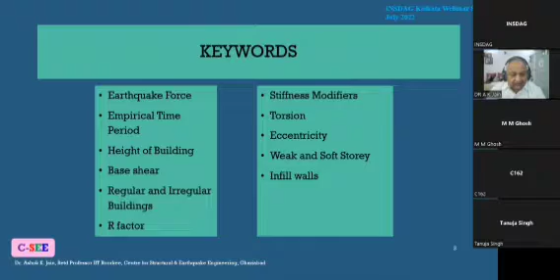Now, understanding Indian codes on earthquake: it is quite difficult to understand 1893, 13920 and 16700 codes, mainly because of the following factors. The level of seismicity in India has been raised equal to or more than that in California and Japan without any quantitative or even qualitative evidence through various stipulations. These codes have been developed using copy, paste, and edit technology. There is no correlation between the original clause and the final clause that has appeared in our code.

The BIS did not produce any commentary, nor is any background information available in the minutes of the meetings which were held to revise this code.

In the absence of all this information, it becomes really difficult to understand and explain the basis of various clauses of IS 1893 code. Some popular commercial software for seismic analysis are unable to comply with some clauses of IS 1893 code because of lack of any logic.

As I mentioned in my previous lecture, although those software claim they are following the 1893 code 2016 edition, if you go through the user's manual, you will find certain clauses they are not able to comply with, and these are clearly mentioned in their user's manual. So please go through the user's manual and find out which clauses are not being implemented.

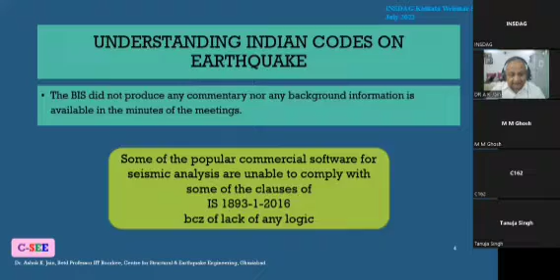Writing a code is an art. I've been associated with this activity since I began my career in 1974 at the Department of Earthquake Engineering, University of Roorkee. The 1975 edition of code 1893 was under preparation at the time. Since 1982, I was associated with the revision of IS 800, later with the revision of 456, 1343, 3370, 4326, and so on.

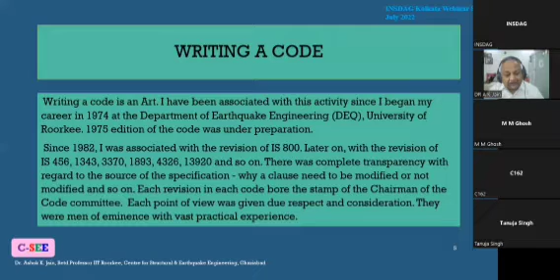There was complete transparency with regard to the source of the specification, why a clause needed to be modified or not, and so on. Each revision in each code bore the stamp of the chairman of the code committee. Each point of view was given due respect and consideration. They were men of eminence with vast practical experience.

The bottom line in writing a code is that the code must be user-friendly and meant for a common designer, not for an expert. It need not reflect the latest research, but must reflect the latest best practice. There should not be any serious mismatch between existing buildings and new ones, to avoid any need of retrofitting of newly built buildings.

Innovation in design must be encouraged. The code must be flexible and forward-looking. The first draft of this code came out sometime in 2006. The last draft came out in February 2016. Comments were circulated, and the committee approved the draft in June 2016.

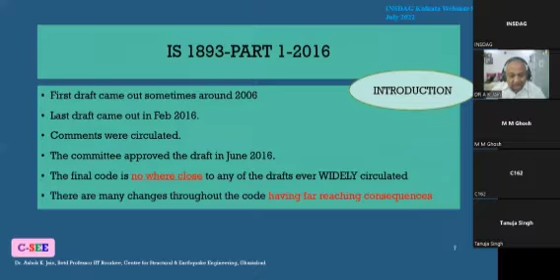The final code is, incidentally, nowhere close to any of the drafts ever widely circulated for this 2016 edition. There are many changes throughout the code having far reaching consequences than what was circulated in June or approved in June. As I mentioned, please do refer to amendments A1 and A2 of this code.

Now, significant changes. What are the significant changes in this code? A very brief note on the foreword. The previous editions gave a detailed explanation and background of the earthquake resistant philosophy adopted in the code. The foreword in the 2002 edition ran 4 A4 size pages. The foreword in the draft 2016 code ran in 6 pages, but the foreword in the final code runs only in 2 pages, first and last page. I wish the foreword was much more detailed, giving the philosophy and background information for the benefit of users.

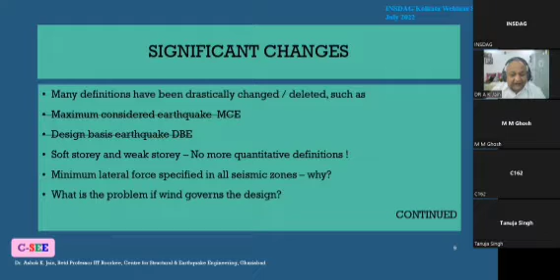Many definitions have been drastically changed and deleted, such as maximum considered earthquake, MCE, and design basis earthquake, DBE. These definitions have been deleted. Soft story and weak story were earlier quantitative, now they are simply qualitative. Minimum lateral force is specified in all seismic zones. Why? What is the problem if wind governs the design? Now, once they have deleted the definitions of MCE and DBE, it becomes very difficult to explain the presence of factor 2 and R in the base shear equation.

Treatment of soft story and weak story with URM, unreinforced masonry walls, is specified. Treatment of RC frame buildings with open stories and URM is specified. Treatment of torsion is changed, making it more difficult to implement even with the help of two widely used programs, STAAD and ETABS. Two different response spectra are introduced, different for static and dynamic analysis.

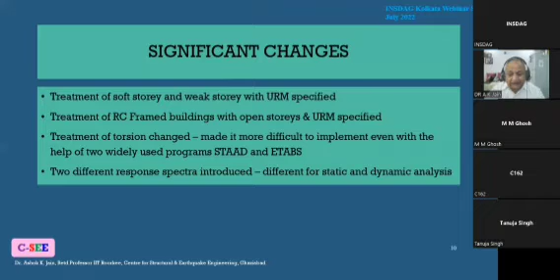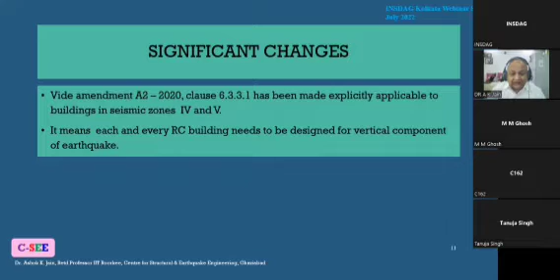With Amendment A2 2020, clause 6.3.3.1 has been made explicitly applicable to buildings in seismic zones 4 and 5. It means that each and every RC building needs to be designed for the vertical component of the earthquake, which in my opinion is completely unnecessary and not required. It's simply crazy.

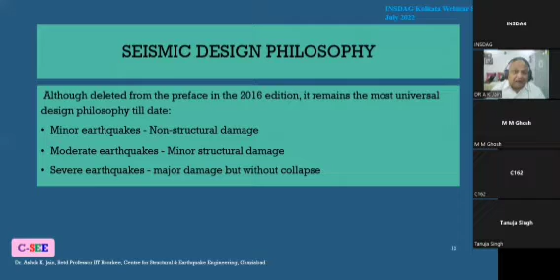Seismic design philosophy, although deleted from the preface in the 2016 edition, remains the most universal design philosophy in all countries of the world till date. Minor earthquakes: there should be no structural damage. Moderate earthquake: there can be minor structural damage. Severe earthquakes: major damage, but without any collapse of the building. These different mechanisms - partial collapse, full collapse, and story mechanisms, etc. - have already been discussed in my first lecture, which was held in the month of June.

In the 2002 edition, it was stated that the design lateral force specified in the standard shall be considered in each of the two orthogonal horizontal directions of the structure. For structures which have lateral force resisting elements in the two orthogonal directions only, the design lateral force shall be considered along one direction at a time, not both simultaneously. Structures having lateral force resisting elements, such as frames and shear walls, in directions other than the two orthogonal directions shall be analyzed considering the load combination specified in 6.3.2.

This clause has been deleted in the 2016 edition.

Now, coming to regular and irregular configurations. A perfectly symmetrical building should have symmetry with respect to geometry, mass, and stiffness, both in plan and elevation. If a structure is geometrically symmetric in plan and elevation, with symmetric mass and stiffness in plan and elevation, that is called a perfectly symmetrical building. In that case, tables 5 and 6 are simply not applicable.

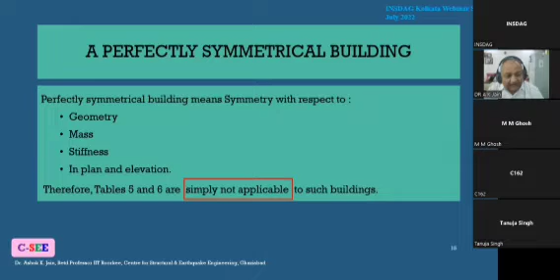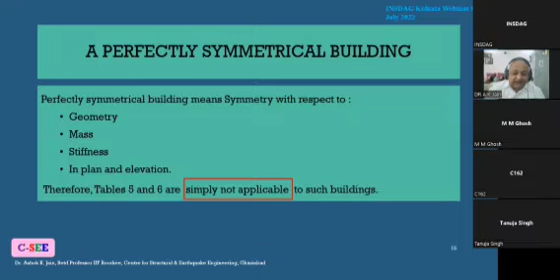I was talking about the perfectly symmetrical building, meaning symmetry with respect to geometry, mass, and stiffness, in plan as well as in elevation. Therefore, in such a case, tables 5 and 6 are simply not applicable to such buildings. But table 6 clause 7 is the culprit.

If you take a perfectly symmetrical building, one that is perfectly square in plan, it will have equal translational periods of vibration in the two orthogonal directions, or it may result in a diagonal mode of vibration. Many designers interpret this as an undesirable mode, an irregularity. They intentionally make it unsymmetric so that the first two translational periods are more than 10% apart, turning a perfectly symmetrical building into an irregular one because of that clause, forgetting the advantage of zero structural eccentricity and nil torsion in a perfectly symmetrical building.

It is collateral damage caused by this seismicity activism by some people in the IS Code Committee. Both ASCE 7-2019 and Eurocode 8 specifically state that a symmetrical building is highly desirable. Clause 7 on buildings in the Indian code omits symmetry as a desirable attribute.

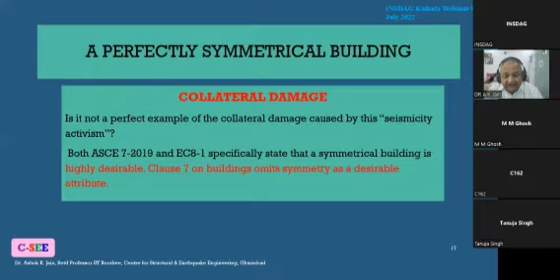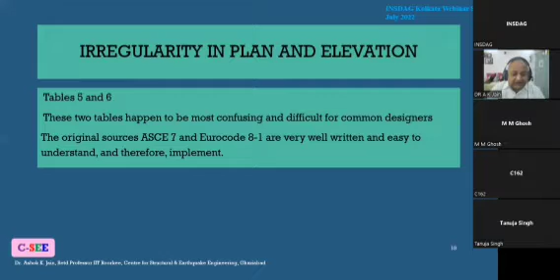Tables 5 and 6 happen to be the most confusing and difficult for common designers. The original sources, ASCE 7 and Eurocode 8, are very well written, easy to understand and therefore easy to implement. Until the 2002 edition this provision was easily understood, but not in the latest edition anymore.

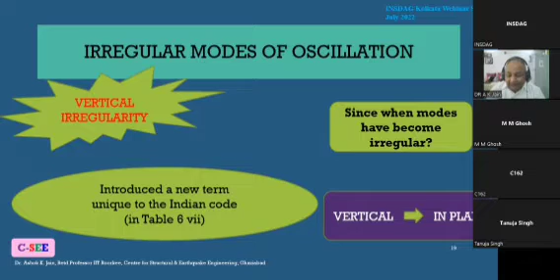As I mentioned, in table 6 clause 7, they have introduced a term called irregular modes of oscillation, vertical irregularity. I don't understand since when modes have become irregular. They're talking about vertical irregular buildings, but then discuss these irregular modes in plan. I have no idea what they're talking about, and I doubt even they have any idea what they're trying to say here.

In table 6.7, buildings in seismic zones 2 and 3 must ensure that the first three modes contribute at least 65% mass participation in each principal direction. For those in seismic zones 4 and 5, in addition to the first three modes contributing at least 65% mass participation in each principal direction, the fundamental natural periods in the two directions shall be away from each other by 10%. This clause is unique to India.

There is no such stipulation even in ASCE 7 or Eurocode 8, from where most of the code has been copied. This is very important for you to understand - this clause is not there. Now, what happens if this clause is not satisfied?

How to satisfy this clause? If you have designed your building or are carrying out a dynamic analysis and find that this Table 6, clause 7 is not being satisfied, then the question arises how to satisfy it. For that, you have to change the architectural plan - the location of shear walls, the structural system, or its salient features, column and beam sizes may be modified, and other things. So you will have to make drastic changes in your basic building so that this clause is satisfied.

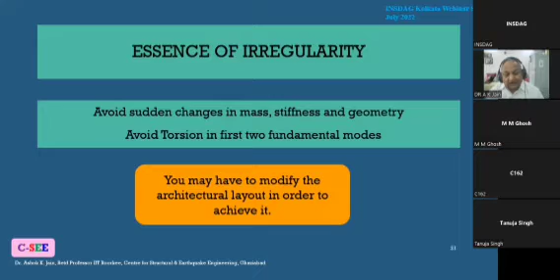Building with soft story - in the ground floor, for parking, we need open space. So what most people do is raise the multi-story building on columns alone. On the ground floor you only have columns, and on the upper floors you have infill walls or RC walls and so on. This is a perfect example of a soft and weak story, and this is highly undesirable. This will lead to a sway mechanism, as I discussed last time, and this must be avoided. Otherwise the building is in serious condition with respect to failure. So this has to be avoided.

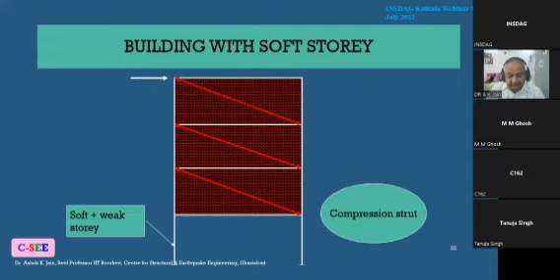Now, in the 2016 edition, that's how soft story has been defined: it is one in which the lateral stiffness is less than that in the story above. Now, it doesn't specify how much less - 1%, 0.5%, 20%, 30%, or how much? The story lateral stiffness is the total stiffness of all seismic force resisting elements resisting lateral earthquake shaking effects in the considered direction. That is the definition given.

Similarly, for weak story, it is one in which the story lateral strength is less than that in the story above. Again, how much less? 0.5%, 1%, 10%, 20%, how much? Just because it is less doesn't mean it becomes a weak story. The story lateral strength is the total strength of all seismic force resisting elements sharing the lateral story shear in the considered direction. This definition is simply crazy.

In the 2002 edition, let's see how soft story was defined: it is one in which the lateral stiffness is less than 70% of that in the story above, or less than 80% of the average lateral stiffness of the three stories above. Now, this is a quantitative definition - it can be understood, it makes sense. It was there earlier, but I don't know what was the idea behind the changes in the 2016 edition. Those people removed this quantitative definition and made it qualitative, which makes absolutely no sense.

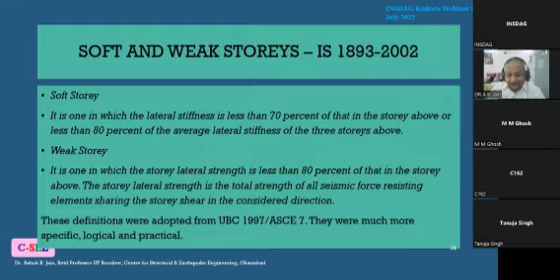Similarly, weak story: it is one in which the story lateral strength is less than 80% of that in the story above. The story lateral strength is the total strength of all seismic force resisting elements sharing the story shear in the considered direction. These definitions were adopted from UBC 97 / ASCE 7 - they were much more specific, logical, and practical. But in the 2016 edition, they chose to delete it and replace it with the term 'less', which is absurd.

Soft story, table 6, clause 1. The structural plan density shall be estimated when unreinforced masonry and infills are used. When SPD of masonry exceeds 20%, the effect of URM infills shall be considered by explicit modeling in the structural analysis.

Now, the funny part is the design forces for RC members shall be the larger of that obtained from analysis of bare frame 2D or 3D modeling. So you carry out a bare frame model, design it, then model it as frames with URM fills using 3D modeling and design it again, then choose the worse of the two.

Now, how can you have two different independent designs with this kind of requirement? How do you compare them, and how do you make changes so that the design is a combination of the worst of design one and design two? I don't think the people who wrote that clause have ever designed even a single story building. That's why they come up with such crazy ideas.

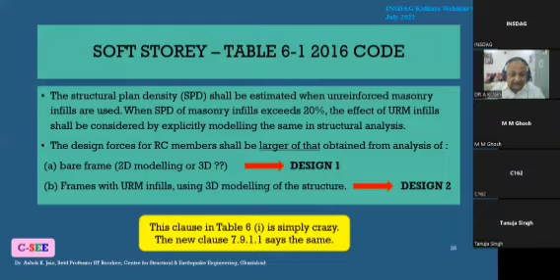The new clause 7.9.1.1 says the same thing. Soft and weak stories: in simple language, such irregularity is simply not permitted. If you wish to provide space for parking, you must provide sufficient RC walls or braces, whether RC or steel, at appropriate locations in both directions, so as to permit the desired movement of vehicles, while ensuring no such irregularity remains in the building.

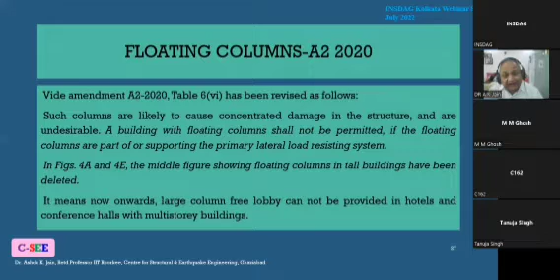Floating columns, Amendment A2, dated 2020. Why this amendment? Such columns are likely to cause concentrated damage in the structure and are undesirable. A building with floating columns shall not be permitted if the floating columns are part of or supporting the primary lateral load resisting system. In figures 4A and 4E, the middle figure showing floating columns in tall buildings has now been deleted. It means now onwards, a large column-free lobby cannot be provided in hotels and conference halls in multi-story buildings.

That is the implication of this floating column clause. Floating or gravity columns: such a column is not permitted to be part of the lateral load resisting system. It can participate only in carrying gravity load, meaning no bending moment can develop within the column.

Now this has caused a lot of confusion, and most designers have come up with their own innovative interpretations of how to implement this in software and in design. Some set its moment of inertia to nearly zero so it won't carry bending moment, but such an idealization is incorrect, because you can set moment of inertia to zero in your model, but how do you make it zero in real practice in a real building? The real moment of inertia is not zero, so that modeling is not correct.

The correct modeling is to introduce moment releases at the ends of each such column at every story, but this must also be reflected in the detailing of reinforcement. If you can't detail it accordingly, then this modeling is incorrect.

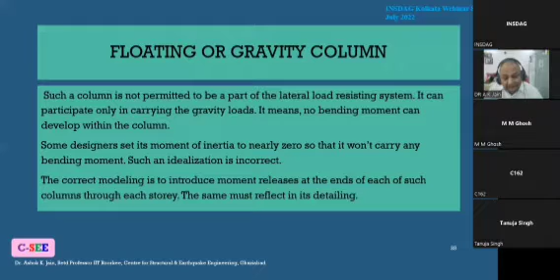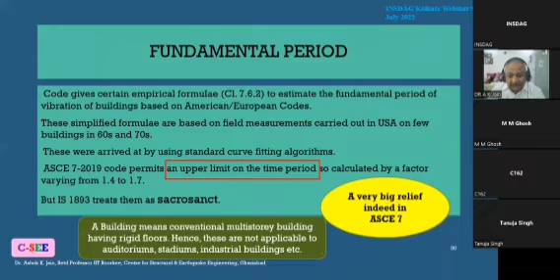Fundamental time period. I've already discussed this clause in last week's lecture, so I will not spend too much time on this. In clause 7.6.2, our forefathers tried to develop simplified equations such as T equals 0.1n, where n is the number of stories, and T equals Ct times h to the power 0.75, where Ct has been defined for different types of buildings.

As I mentioned, the testing of multiple buildings was done in the 60s and 70s in America. These were steel moment frames, and they did curve fitting and developed the formula T equals 0.028 h to the power 0.8, in FPS units. They have an upper bound and a lower bound; in red, I'm showing the lower bound. This formula is in FPS units, and the MKS version you already have with you in the code.

So T is based on curve fitting of data obtained from measured response of California buildings and other states after small earthquakes. As you will see later, the smaller the period, the larger the earthquake force it was designed for. Hence, a lower bound empirical relationship is used. However, this lower bound period is about 1 over 1.4 times the best fit period. These are the empirical formulas.

So what the code does, the ASCE code permits some relaxation, up to 40%, depending upon various situations. So ASCE takes care of this bandwidth, but the Indian code is very strict. It follows only the lower limit and does not give you any benefit whatsoever, which ideally should have been given, because this formula is essentially copied from the ASCE code.

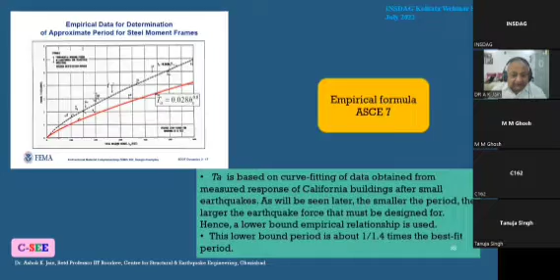Now, the fundamental time period is 0.075 h to the power 0.75 for RC buildings, and 0.085 h to the power 0.75 for moment resistant steel buildings. There's another formula given for braced frames and infill wall frames: T equals 0.09 h over root d. This formula is totally outdated; it is based on infill walls.

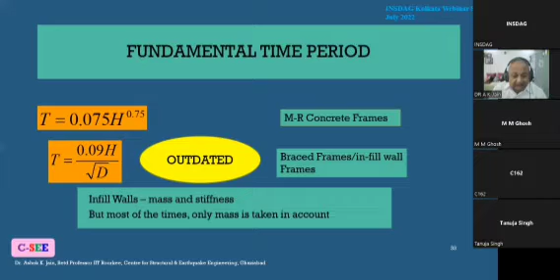Now, Uniform Building Code of USA was very popular on the west coast of USA due to its seismicity. In the 1970 edition, it introduced an equation to determine the time period of non-moment resistant frame buildings, using H and D. This formula was adopted in IS 1893 in the 1985 edition, and it has been retained ever since.

There is a systematic effort to make the IS 1893 code more stringent with each revision and amendment. Other international codes such as ASCE 7 and Eurocode 8 do not use this equation at all. This formula has been deleted in those codes for more than 20 years. But in the Indian code, they have retained it despite strong objections to delete this formula. They have chosen not to delete it. They would like to have a very, very high earthquake force, which is not really logical.

Now, they have explained the values of H and D through figure 5. This is the definition of height H. This formula for height H is also applicable to the formula T equals 0.075 H to the power 0.75. It says height H in building, see figure 5.

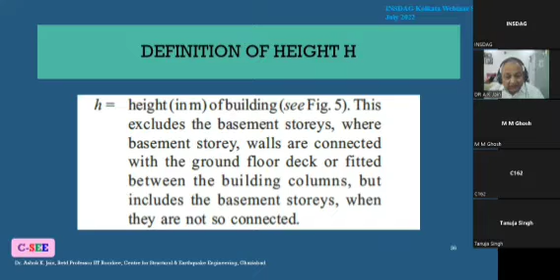This excludes the basement stories where basement story walls are connected with the ground floor deck or fitted between the building columns, but includes the basement story when they are not so connected. This is figure 5A, 5B, and 5C. In figure 5A, a ground level is shown, and the building goes a few meters inside the ground level. There are no shear walls, and therefore height H is taken up to the bottom of the building, as shown in figure 5A, and D is the depth of the building, also shown in figure 5A.

Now in figure 5B, below the ground level there are shear walls, shown by thick lines. Because shear walls are there, this portion below the ground level forms an independent, very stiff portion of the building. Therefore, the height of the building is taken up to the top of the ground level, and similarly the depth of the building is taken as D, as shown in figure 5B. The basic difference between figure 5A and 5B is that in 5A there is no shear wall below the ground level, whereas in 5B there are shear walls shown by thick lines. So because of that, height H is different in the two cases.

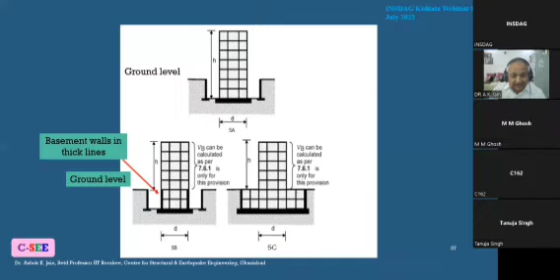In figure 5C, again there are shear walls below the ground level, and there is a floor at the ground level itself. Therefore height H is taken up to the ground level, and similarly D is also taken as shown in figure 5C. I hope with this explanation the meaning of figures 5A, 5B, and 5C is clear. This was requested by Mr. Ghosh, to specifically discuss this particular issue.

This reduces the height of the building drastically, and therefore also reduces the time period of the building drastically. And therefore it increases the lateral force acting on the building significantly, several times more. This is the concept of weighted height in buildings with plaza floors, which thereby increases the base shear manifold. Needless to say, this change clause is unique to the Indian code and without any serious application of mind. The way it was introduced in the 2016 code, it largely went unnoticed by most designers because this formula was given in the figure, not in the text. So unless you are specifically making use of it, you wouldn't know that this formula has been modified.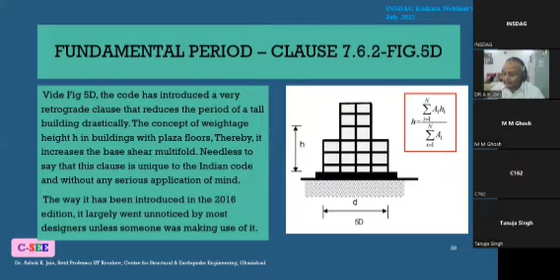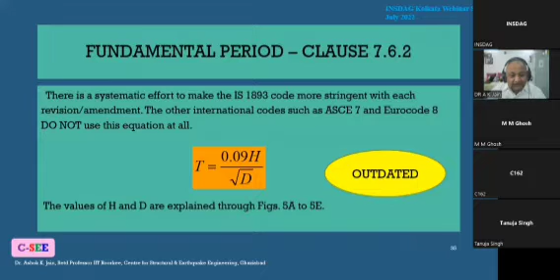Now fundamental period clause 7.6.2 in buildings with RC structural walls gives this formula, based on Eurocode 8 part 1 clause 4.3.3.2.2, where the total effective area of the walls is given in the first story like this. Using the formula h by d, this clause T equals 0.09 h by root d.

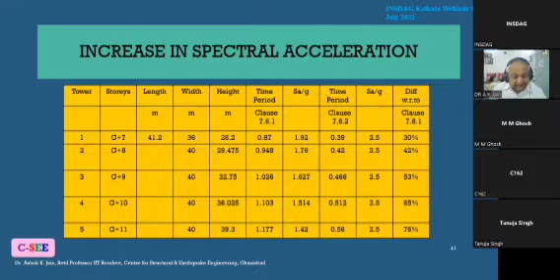You find the difference with respect to clause 7.6.1 - in this case I have analyzed 5 different buildings: G plus 7, G plus 8, G plus 9, 10, and 11. I've given the various values, and with respect to clause 7.6.1, the increase in base shear due to the formula 0.09 h by root d is 30% to 76%. They are simply crazy and not willing to listen to delete this formula, as has already been deleted in international codes.

Now what to do in such cases where you have a plaza and tower above it? The period of such a building should be estimated using either the Rayleigh's equation or frequency analysis. The use of weighted height as specified in the code is a very big disaster.

Now coming to stiffness modifiers. Clause 6.4.3.1 requires that for structural analysis, RC beams and columns are to be treated as cracked, and therefore their flexure stiffness must be reduced for analysis, because you are dealing with limit state of collapse. Designing a building for limit state of collapse due to earthquake force - at the time of collapse, there would be large-scale cracking in beams and columns. Therefore their stiffness would reduce because of the cracking.

A lot of designers are confused with the word analysis. They think that the design forces obtained are not applicable to design. This is an incorrect understanding. It simply means that the design forces so obtained by using the stiffness modifiers for their stiffness ought to be used in design - otherwise what is the use of such analysis? That means bending moment, shear force, axial force etc. obtained by using the reduced stiffness, using the stiffness modifiers - those forces are to be used for the design of the building.

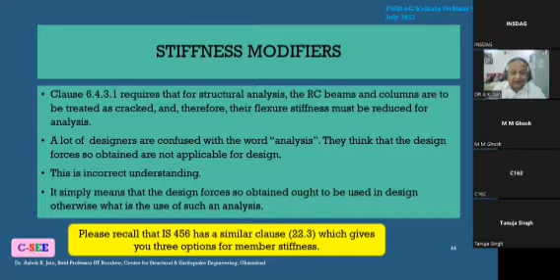Now what is the effect of stiffness modifier on the building as such? There are 2 profound effects. One is reduced lateral stiffness means higher lateral displacement. It will also affect story drift. Both of them need to be controlled.

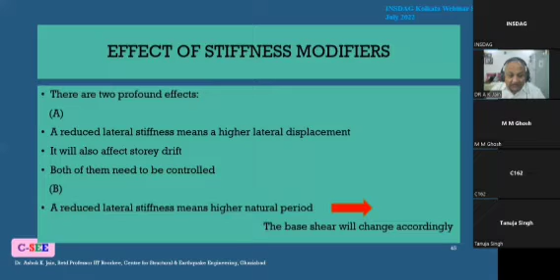Option B is reduced lateral stiffness means higher natural period. And because the period is higher, therefore the base shear will reduce most of the time. Under certain cases, the base shear may increase. That's why I have written here: the base shear will change accordingly, depending on which part of the response spectra you are located. So these are the effects.

Minimum lateral force. Now in the 2016 edition, they have introduced minimum base shear for which you have to design a building. After a lot of discussion with people involved in the revision of that code, I was told the reason is that they think designers are manipulating the time period or the base shear formula to intentionally arrive at a lower base shear. During the meeting on revision of this code, it was stated that many designers are manipulating the base shear by deliberately choosing wrong values of parameters, thus arriving at a lower design base shear.

Now, the basis of writing a code can and should never be distrust. This is no way to design or write a code by not trusting the designer. See, if somebody is manipulating like this, he will bear the consequences. And nobody is crazy enough to let his building collapse. He will never, nobody will ever do this intentionally. Never, absolutely never - if you are in your good senses, nobody will ever do such a thing that he makes sure the building will collapse. No, nobody wants the building to collapse or somebody to get hurt. There may be some unintentional mistakes, that's a different issue. But saying that people are deliberately choosing wrong parameters to reduce the design base shear is simply stupid.

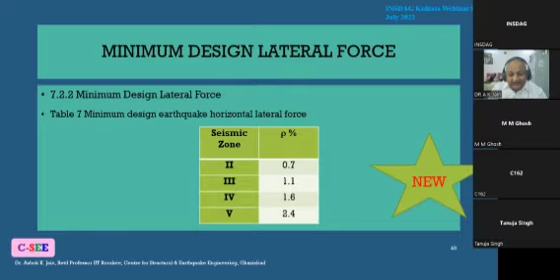Now I tried to back-calculate how to get these base shears from 0.7% to 2.4%. I chose zone 2, 3, 4, 5, for I equal to 1, R equal to 5, and rho given in table 7. The value SA by G are as follows: 0.7, 0.68, 0.667, 0.666.

It means for hard soil, the period of structure is given by 1.43, 1.45, 1.5 seconds. It means a structure cannot have a fundamental period more than 1.5 seconds for the purpose of computing base shear. So for hard soil, they are forcing the fundamental period to be maximum 1.5 seconds, which I think is again absurd.

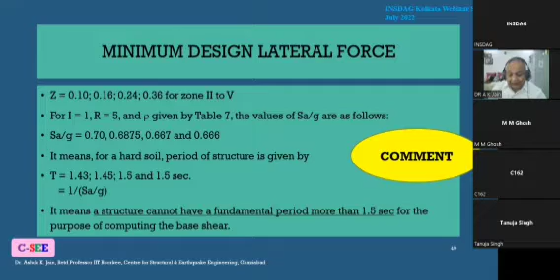Static and dynamic analysis - there was static and dynamic analysis given in the 84 code, 2002 code, and then 2016 code. It is interesting to see how the applicability of static and dynamic methods to various buildings has been changed with each revision without any logical evidence.

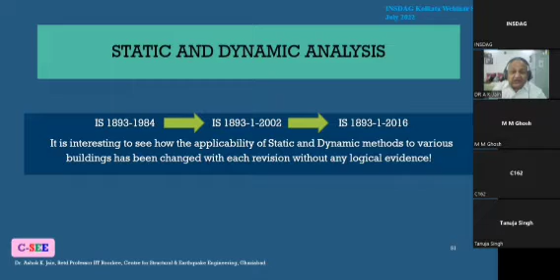Earlier codes, including 2002, were applicable to framed buildings as follows. Until 2002, meaning until the introduction of the 2016 code - that means till 2016 we were following the 2002 code or previous editions like the 84 edition. For regular buildings only, in zone 2 and 3, height up to less than 90 meters, you could use the seismic coefficient method.

Can you believe this? Till 2016, before this new code was introduced, you could use the seismic coefficient method in zone 2 and 3 for buildings up to 90 meters high. And suddenly, with the arrival of this new code, this became illegal, unsafe.

What is the basis? Nobody knows. Has somebody done some analysis? Is there any evidence of any damage to such buildings designed using the static seismic method in zone 2 and 3? Not a single case is there.

Similarly, in zone 4 and 5, up to 40 meters height, you could use the seismic coefficient method; for all other regular buildings, response spectrum method. For irregular buildings, only in zone 2 and 3, up to 40 meters, you could use seismic coefficient method, and beyond 40 meters, response spectrum method. In zone 4 and 5, up to 12 meters - about 4 stories - you could use seismic coefficient method, and beyond that, response spectrum method. So this was there till the 2016 code was introduced, sometime in June, July, or August 2016.

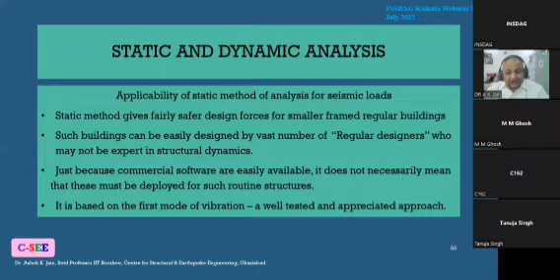Seismic coefficient method of analysis for seismic loads - IS 1893:2016, clause 7.6, suddenly made the seismic coefficient method applicable only to regular buildings less than 15 meters in height in zone 2, and made the response spectrum method applicable for all buildings. Now, I don't understand how they bring in such sudden changes without any basis, without any application of mind, and come up with these laughable specifications.

Nobody knows what is the basis of this change. There is no evidence whatsoever as far as field observations are concerned.

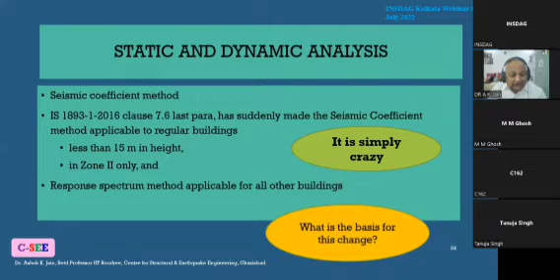Foundation modeling - IS 1893 is silent about foundation modeling. However, ASCE 7 clause 12.7.1 deals with foundation modeling. For the purpose of determining seismic loads, it is permitted to consider the structure to be fixed at the base. Alternatively, where foundation flexibility is considered, it shall be done in accordance with clause 12.13.3 or chapter 19 of ASCE 7. So if you want detailed specifications, please refer to ASCE 7 clause 12.7.1.

Now, in Indian specifications, you have an RC column, a plinth beam, a foundation beam - that's the physical model. On the right-hand side, I have shown the computer model. That's how you can do the modeling, and you can treat the base of the column as a pin, because the moment acting on the columns will be balanced at the foundation beam level. So the foundation beam will carry the moments appearing in the column, and therefore, as far as the base of the column is concerned, it will carry only axial force - moments will be restricted at the foundation beam level itself.

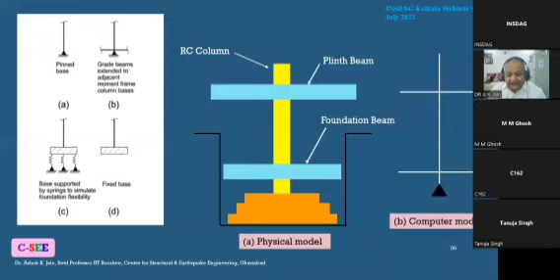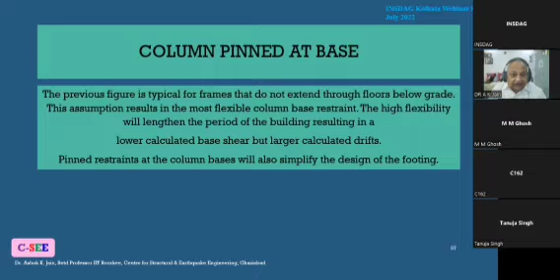Column pinned at base is the previous figure typical for frames that do not extend through the floors below grade. This assumption results in the most flexible column base. The high flexibility will lengthen the period of the building, resulting in a lower calculated base shear but larger calculated drift. Pin base at the column will also simplify the design of the footing, because now you're designing the footing only for the vertical or axial load force, not the moments.

Now you have another option where you have RC column, plinth beam, and raft or pile cap. So you have a physical model and then you have a computer model. In the computer model, the column is treated as fixed at the top of the raft or pile cap, and because you have a raft or pile cap, it can take enormous bending moment.

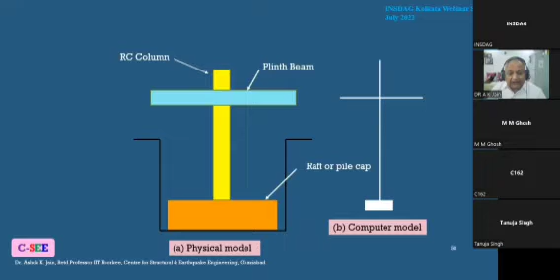Torsion. Now, if you have an unsymmetrical stiffness distribution, then you can get torsion in the building about the vertical axis of rotation. So you have a corner store, a storefront building in the middle, and a corner building where you have only one wall and on all three sides you have glazing, steel or glass.

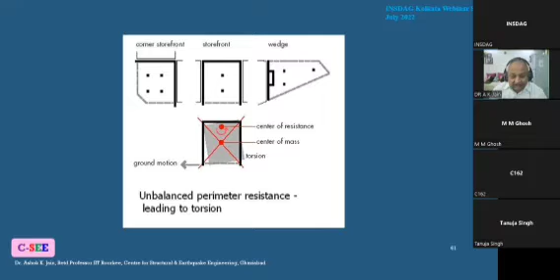Because of this asymmetry, in the middle case the center of resistance is shown there, and the center of mass also shown. Because of the distance, or eccentricity, between center of resistance and center of mass, you have torsion. Torsion is a highly undesirable phenomenon.

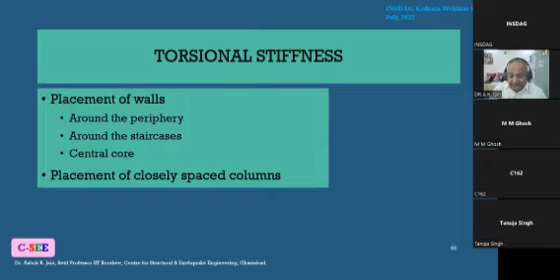Now, for torsion analysis, placement of walls is very, very critical: whether you put the walls around the periphery, around the staircase or central core, or placement of closely spaced columns. This is one option where you have the walls placed at the core and center of the building, with only columns all around the periphery and in the middle of the building.

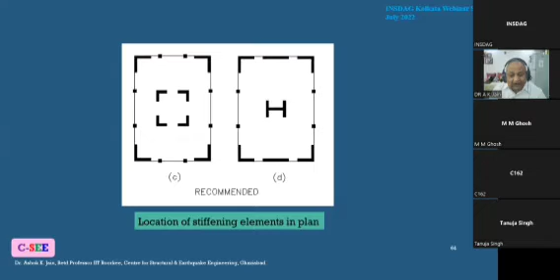This is recommended. Here, in thick lines, I have shown the RC shear walls. You have shear walls at the corner and the perimeter also, as well as in the middle. These are desirable locations for stiffening elements in the building plan.

For torsion, there are two design eccentricities specified in the code: ed1 = 1.5 times e plus 0.05 B, and ed2 = e minus 0.05 B. The first equation is unique to the Indian code, because the 1.5 factor is there only in the Indian code, not in any other code in the world. The first equation governs the rigid side of the building, and the second governs the flexible side.

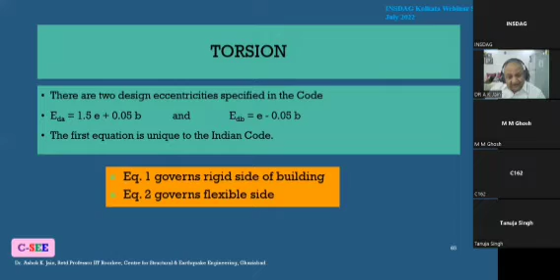I also discussed this torsion in my last week's lecture.

Now the foreword of the code says that the treatment of torsion has been simplified. I don't know how. It is possible to include these equations in ETABS and STAAD, with some difficulty now. Is heaven going to fall if the factor 1.5 is made unity? Are ASCE 7 and Eurocode 8 wrong, or unsafe, when they ignore the factor 1.5?

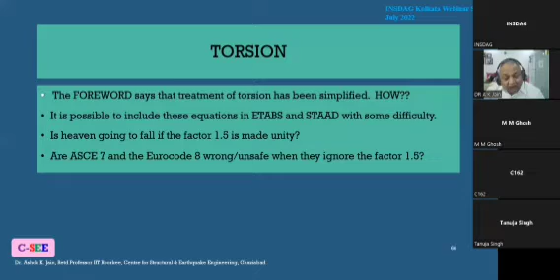And they are saying they have simplified the analysis. If you read the code's foreword, it clearly says the treatment of torsion has been simplified. I don't know how it has been simplified. I think it has been made difficult and absurd.

Now here I show you the definitions through this diagram. CR is center of rigidity, that is center of stiffness, and on the other side is center of mass. You have eccentricity along the x direction as well as along the y direction. So if towards CR, this is known as the rigid side, and towards CM, that side is known as the flexible side.

The earthquake force always acts at the center of mass on each floor. Now this force has to be balanced by a reaction, so the building will develop resistance through the center of rigidity. The force acts at the center of mass, and the equal and opposite reaction develops through the center of rigidity.

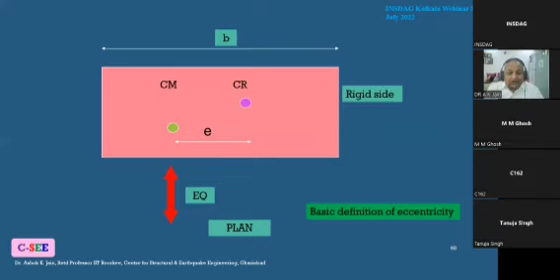The distance between center of mass and center of rigidity is e. Therefore, a torsion will develop in plan, equal to the force times e, as shown in this figure. That is the basic definition of eccentricity. And remember, the total width of the building normal to the direction of the earthquake is B.

When you apply the first clause, that is 1.5 times E, what you do is magnify the distance between CM and CR by a factor of 1.5, and you get another center of mass, or CM prime. That is the effective center of mass because of 1.5E. You magnify and increase the distance between CM prime and CR. That is the intention behind the first clause.

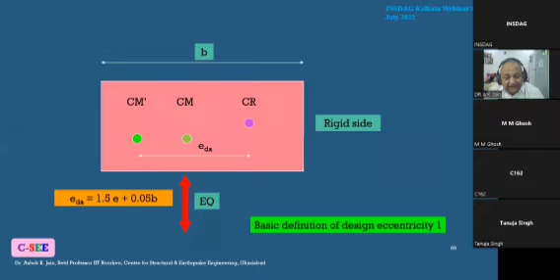In the second clause, E minus 0.05B, the CM is shifted towards the right, and the eccentricity is now reduced. So it becomes CM prime again. The effective center of mass, shown by CM prime, is now reduced as compared to E, by 0.05B. The term 0.05B, as I discussed in the last term, is known as accidental eccentricity, and various factors causing accidental eccentricity I have already discussed.

Now what happens here: when torsion is applied, you are applying a force F to the center of mass, and there is a reaction F acting at the center of rigidity, and the building will twist. Because of the rigid side, the displacement or lateral displacement at the rigid side will be very small, as shown by this circle here, and on the flexible side you will find a very large lateral sway.

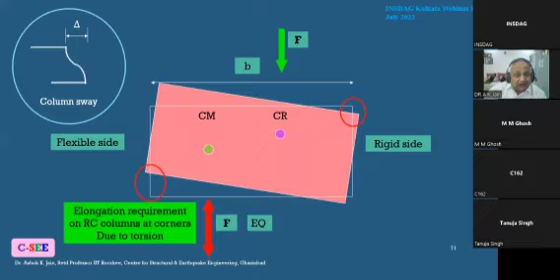Now the elongation requirement of the RC column at corners will increase significantly. As shown in the other figure, column sway, on the top left corner of this slide, you have a column which will undergo this large sway delta. The question is whether your RC column or steel column is able to absorb this huge lateral sway caused by torsion at the flexible side or flexible corner of the building.

Because concrete has limited elasticity, similarly steel also has limited inelasticity. You have connections there: welded connections, riveted connections, bolted connections. Whether they have this much flexibility to absorb this additional elongation in the steel column or RC column. If not, the concrete will crack or fracture. Similarly, steel columns will also yield too much or buckle, and the structure is likely to fail.

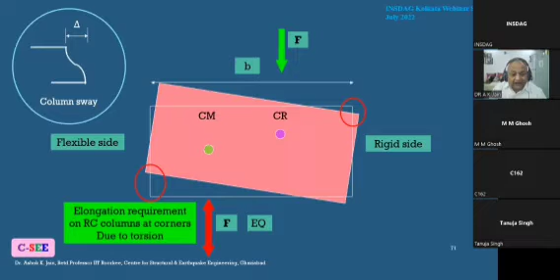That is the reason why torsion is to be avoided at any cost. Torsion is fatal. The world over, maximum damage of collapse, both partial and total, in RC buildings as well as steel buildings, occurs due to torsion during an earthquake. The concrete columns and walls are unable to meet the elongation requirement at the flexible edges, and similarly steel is also not able to meet those requirements, and therefore they collapse.

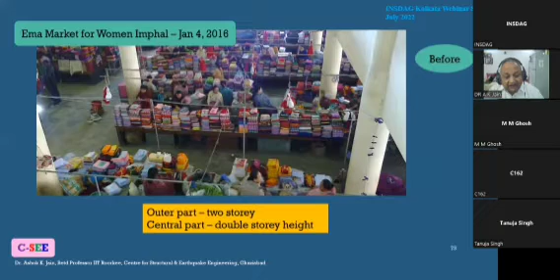I show you the example from Ema Market for Women in Imphal, January 4, 2016. This is before: a small building where the central portion is single story double-story height, and all three sides have this double story. The outer part is two story, the central part is double-story height. This is before the earthquake occurred, and this is after the earthquake has occurred.

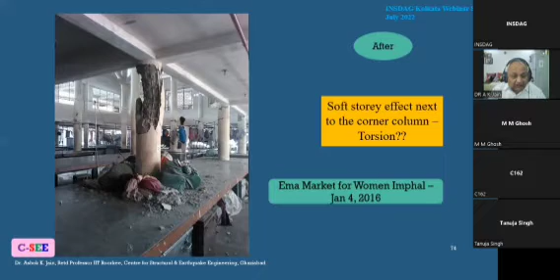Soft storey effect next to the corner column is torsion. You can see the effect of torsion in the corner columns. Otherwise the building is okay, except the columns are gone, the cover is gone, and the core is also gone significantly. This is again another column after, where the cover is totally lost, and you lose confidence in such a building.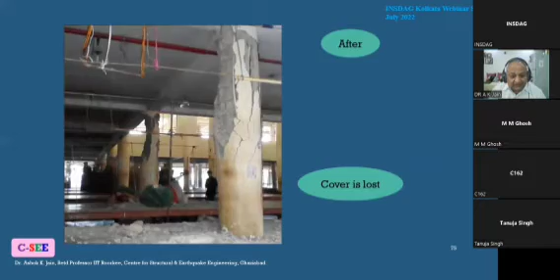Remember, the damage during an earthquake occurs within 5 seconds or 10 seconds maximum, hardly 5 seconds, not even 10 seconds. The building has to collapse within any 5 seconds of the strong earthquake in that particular case. It's not going to show any mercy whatsoever.

R factor: a shortcoming of IS 1893-1984 was that the designer had no idea of the factor of safety or reliability across seismic zones, and made use of inelastic response spectra without the knowledge of the designer. Even the 1984 code had relied on inelastic response spectra, but without the knowledge of the designer. It was supposed to be based on the working stress method, but internally it was not based on working stress method; it was based on the inelastic behavior of the building.

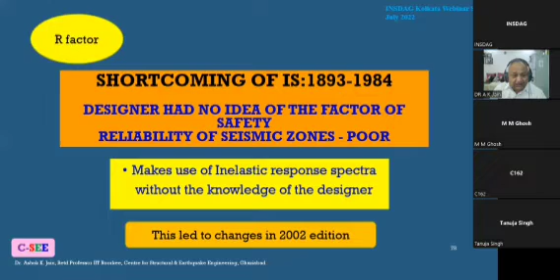So they thought, let's make it explicit. In the 2002 edition, a factor R was introduced so that you understand exactly what the R factor is and how it came in. That's how they brought in the concept of MCE and DBE.

So the option of the designer depends heavily on lateral strength, that is ductility, because we don't know even today what magnitude earthquake will occur at a given site and when it will occur. Whatever code is given is only estimated forces, but we don't know what the actual force will be during an earthquake. So we have to take care of minimum design force in the building and provide ductility to take care of additional force which may come on the building because of the real earthquake.

So the effect of the R factor on strength and displacement, these figures I've already discussed last month in June, so I'm not going to discuss them again.

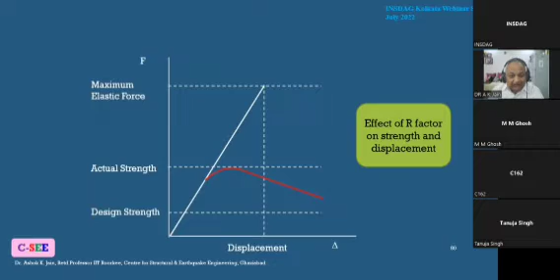Again, same thing. This is the formula given in the 2002 edition and the same in the 2016 edition: Z by 2, I by R, SA by G. This is the formula for the base shear.

The basis of the R values - last time in the June edition I also told you how the response reduction factor can be derived by carrying out actual non-linear analysis. The values of the various parameters in the equation for the horizontal seismic coefficient were developed based on experience and judgment. The governing criteria was that the base shear determined using the 1893-84 code and the 2002 edition must nearly match in all zones for various time periods.

That means the 2002 response spectra was calibrated with respect to the 84 edition for base shear. Let me explain in simplified terms what this means. You have designed a building using the 1984 code, let's say in January 2001 or January 2002.

And then you have the 2002 code where the base shear is given by this new formula, Z by 2, I by R, SA by G. And when you calculate the base shear as per the new code, you find this base shear is 50% more. Now, just a few months ago, you designed this building using the 84 code, because the 84 code was applicable until the 2002 code was introduced. Now the question arises, if the base shear suddenly increases by 50% or 20% or even 10%, what do you do?

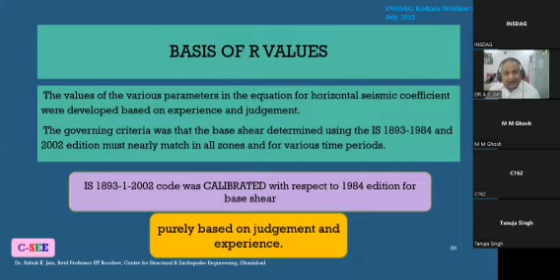So we did a lot of parameter study and then came up with the formula for R and I and other factors. So these values of R given in the code, whether it is part 1, part 2, part 3, part 4 of 1893, or even this 16700, they are all based purely on judgment and experience, but calibrated with respect to the 84 edition.

Now, there is another problem which was introduced. The purpose of the R factor is to reduce the design base shear to account for ductility and probability of occurrence of earthquake in a given zone. But this objective is negated by using the amplification factor in the partial load factors used in the load combination - remember the 1.5 factor for EL, for the earthquake loads.

Thus, the effective R factor for seismic force reduces from 5 to 5 divided by 1.5, which is 3.33.

ASCE 7 reduced the amplification factor from 1.5 to 1 many years ago. AISC, the American Institute of Steel Construction, which produces the steel code for America, was the first to reduce the factor from 1.5 to 1, more than 20 years ago. Even the Indian Road Congress, IRC 6, in its 2010 edition, reduced the amplification factor from 1.5 to 1, 12 years ago - but not 1893:2016. They love to design buildings for very high earthquake force without any basis, without any logic.

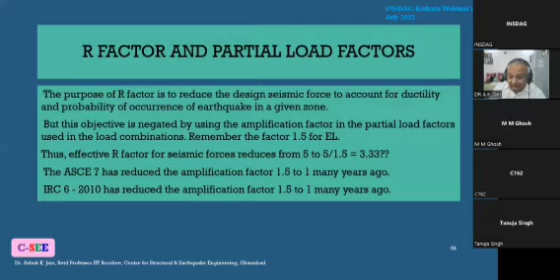The question is, will 1893 part 1 ever correct this anomaly? I don't know. I don't have the answer.

Okay, R factor as per NBC 2016, National Building Code, Part 6, Section 6. This is very interesting, table 9, note 1. I'm talking about National Building Code introduced again in 2016, Part 6, Section 6.

Because the problem is that our earthquake committee will not listen to anybody. There were so many requests to modify the R factors, or change this requirement of static analysis, dynamic analysis, and so on, but they are extremely rigid, single-minded: no, we have to keep on increasing the force as much as we can.

So what they did in NBC: this Part 6, Section 6 refers to the steel code, not the earthquake code, because the earthquake committee is the same as in NBC, which is the same as in your 1893 code. So the earthquake committee will never accept a reduced value of R.

So what they did, they made a move through the steel code, steel committee of NBC 2016. Table 9, code note 1 says RC and steel structures in seismic zone 3, 4, and 5 shall be designed to be ductile. Hence this system is not allowed in these seismic zones. It means ordinary frames are explicitly prohibited in seismic zone 3, 4, and 5.

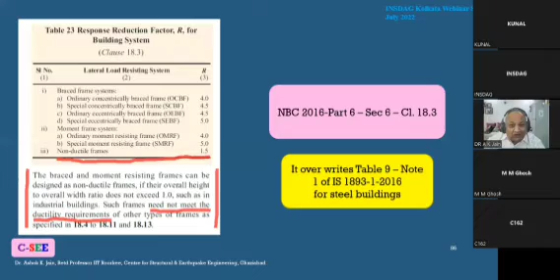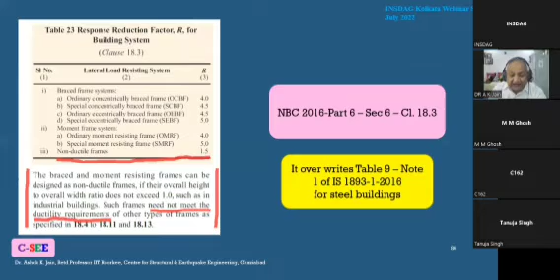I think it is a wonderful step taken by this NBC, because otherwise there's no way the 1893 committee would have agreed to such a change. They have done it through the other code, which you can say technically may not be right, but if everybody is playing their ego, then that is the solution.

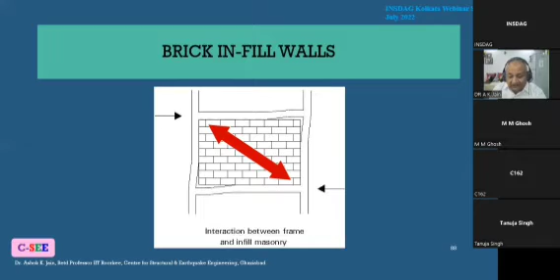Infill walls, big infill walls: if the earthquake force acts in a given direction, then diagonal tension is developed, diagonal compression is developed. This keeps on changing with the change in the direction of the earthquake. It may cause damage to the columns.

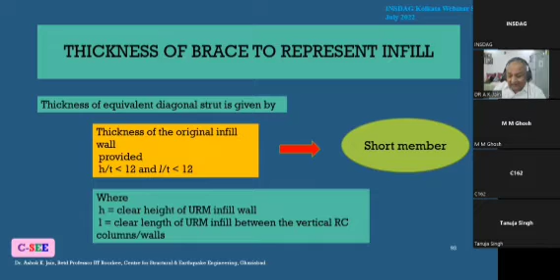In essence, step 1 in the analysis for earthquake force is that the architect prepares the drawings and passes them to the structural consultant. Step 2 is to let the structural consultant run dynamic analysis with different models, assuming member sizes, material, and so on.

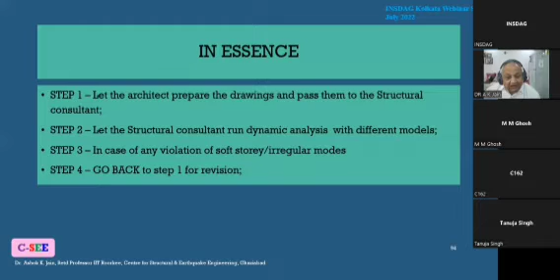Step 3: in case of any violation of soft story or irregular modes, go back to step 1 for revision. Because if any condition like soft story or irregular modes is being violated in your earthquake code model, you have to go back to the architect and tell him, please revise your plan, revise your elevation, let us change the location of the walls or columns or change the sizes, and come up with another alternative, carrying out these iterations as long as necessary to satisfy the code requirements. A lot of people come to me and ask, sir, our building does not satisfy the code, what do we do? The only solution is go back to the architect.

This is very time consuming and expensive in terms of both time and money. And there is no guarantee that the second iteration will also give you the correct results.

What this code does is force symmetric and regular building in zones 3, 4, and 5. It is killing innovation.

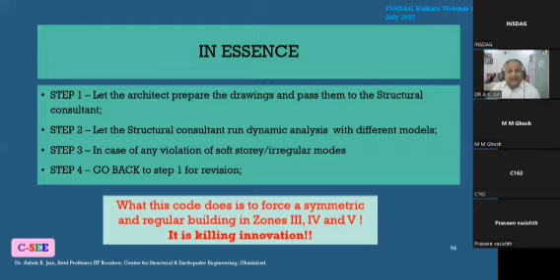Situations not covered in the code: in any code, the basic intention is to cover general situations. It is simply not possible to visualize every situation in a given structure and provide a specific clause. Therefore, designers have to be well informed. If a given situation is not covered, they are expected to refer to specialist literature, reputed international codes, and finally use their experience and judgment, keeping safety as the uppermost factor in their mind.

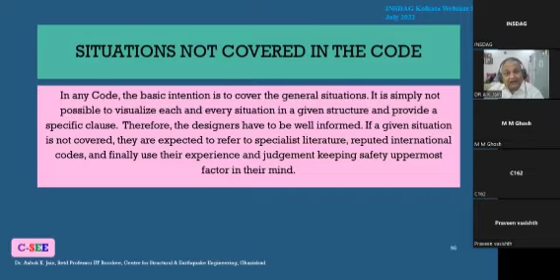If you want to understand the dynamic part of it, you can refer to any textbook, or my textbook, which deals with the concepts of dynamic structures. Thank you very much. Now I will take some questions.

Yes sir, perhaps after going through your lecture, we already have a lot more questions. Firstly, sir, IS 1893 1984, IS 1893 2002, and then 2016 - they are all way apart, it seems, in many of the clauses. And 2016 has been developed in such a fashion that there are illogical entries. So now it is for us to face the issues of this new code. So how to solve this? That is point number one.

Point number two, sir, we were taking help of STAAD or other softwares. Now, as we could understand, these softwares have started lagging in this part. So how to take care of those? That is my second question. I have a series of questions.